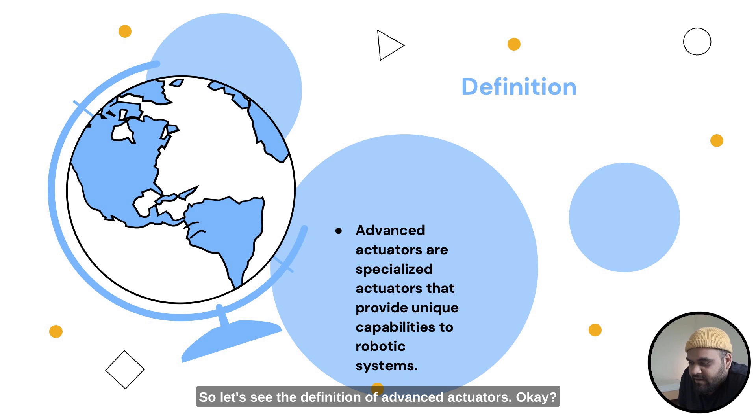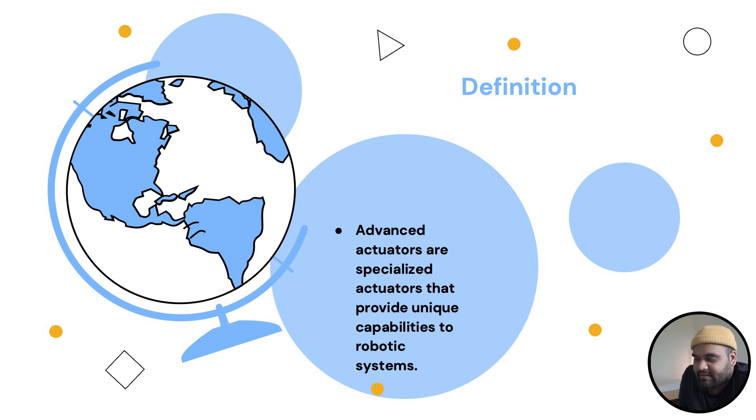So we're in chapter 4 of module 2 now, and we are going to move ahead with this. So let's see the definition of advanced actuators. Advanced actuators are specialized actuators that provide a unique capability to a robotic system. Now, when we talk about unique capabilities, it means features that are not readily available and that require something which is a little unique, but which is very specific as well. Solving the specific needs of an actuator is very important: what you are working on and what exactly it has to work on. That need-based solving is going to be very, very important.

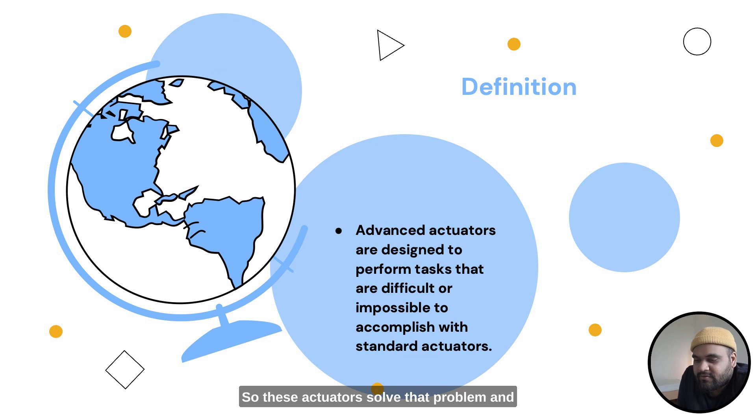Advanced actuators are designed to perform tasks that are difficult or impossible to accomplish with standard actuators. When I say difficult or impossible, it means that you would require either a lot of adjustments or an extreme amount of changes and modification, which at some point doesn't really make sense. So these actuators solve that problem and give you the results that you want.

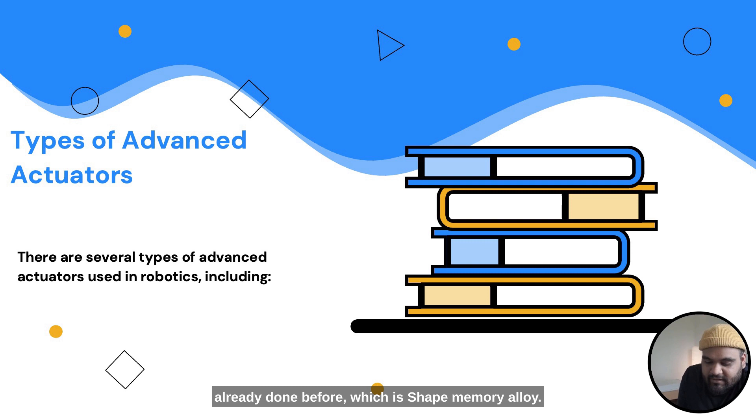And there are several types of advanced actuators used in robotics. Let's start with the first one, which we have already covered before, which is shape memory alloy. In the last chapter as well, we were talking about shape memory alloy, SMA, which can change shape when subjected to heat or electrical current. These are essentially used in soft robots or for medical engineering. When you want to explore different materials, or when you want to make a robot that can go inside the human body and still be able to retain its shape, SMA or shape memory alloys are quite popular.

You can actually go to Amazon and search for a shape memory alloy, and you will find a shape memory alloy wire, or SMA wire. You can actually buy it. Whenever you put heat on it, you can change the shape, and whenever you apply electricity, you can actually get the shape back.

Very cool wire. I actually had one of those wires back in my bachelor's days. Very, very fun memory to play with.

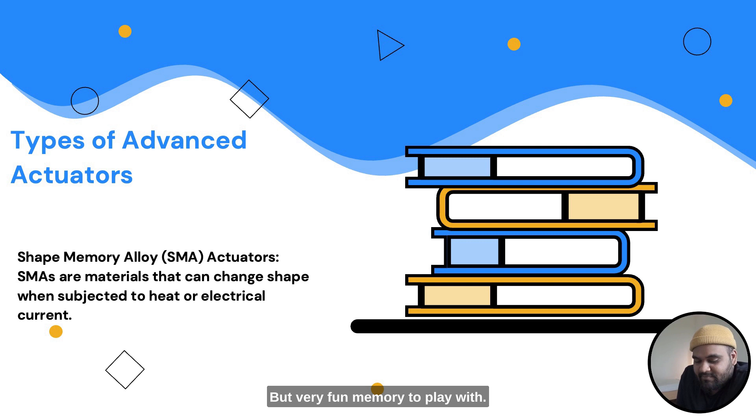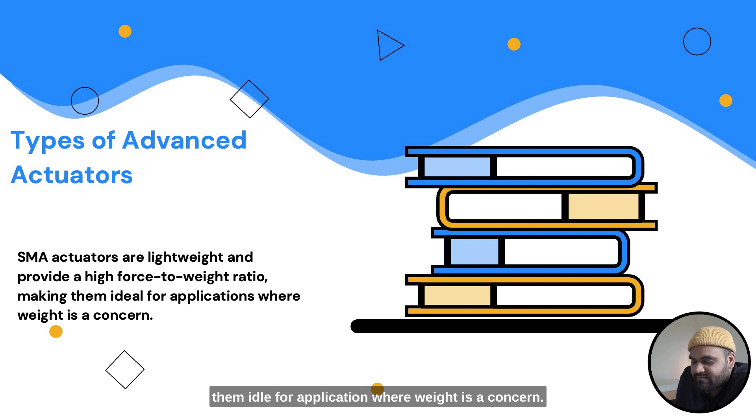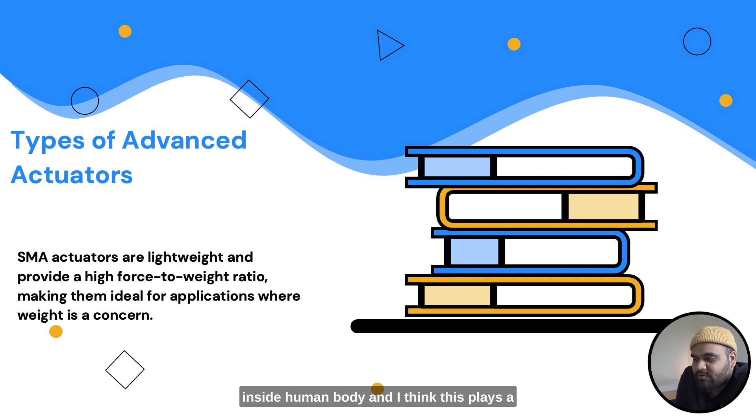Then you have SMA actuators, shape memory actuators, which are lightweight and provide a high force to weight ratio, making them ideal for applications where weight is a concern. Whenever we talk about soft robots, anything going inside your body or biological robots, shape memory alloys play a very important role because they can change shape and they're very lightweight as well. Weight is always a concern when you're putting things inside the human body, and shape memory alloys can play a decent role in making this happen.

Then you have electroactive polymer, or EAP, actuators, which are materials that change shape when electrical current is applied. They are also kind of like shape memory alloys, but they are polymers, which means they don't really have a metal finish. They're more like synthetic materials, like plastic and carbon fiber. EAPs generally change shape only when current is applied, not when heat is applied.

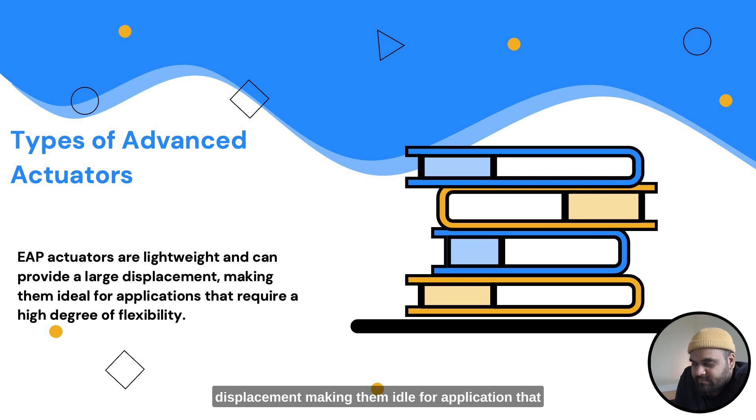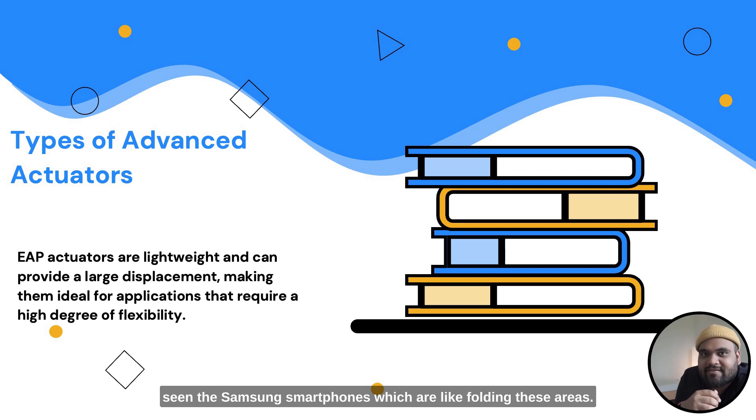EAP actuators are lightweight and can provide large displacement, making them ideal for applications that require a high degree of flexibility. Let's say you have a folding joint, or you might have seen the Samsung smartphones which are folding these days. They also actually have EAPs inside. That's what makes these joints so flexible yet super conductive as well. So these actuators are helpful when you want to make a major displacement by applying electricity, and that's where EAPs come into the picture.

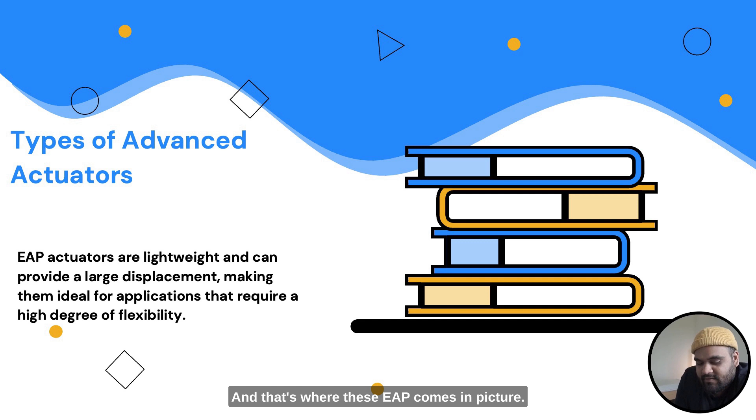Then you have the most popular one, which is piezoelectric actuators. These are extremely popular, very cheap and affordable. You can buy them on Amazon for around 100 rupees. Piezoelectric materials generate electricity when subjected to mechanical stress. Whenever you apply force or stress, they start to produce electricity. That's an important application if you need to convert force on the streets or roads, or on some mechanical places, into something else, or you just want to create electrical signals. That's where these play quite an important role.

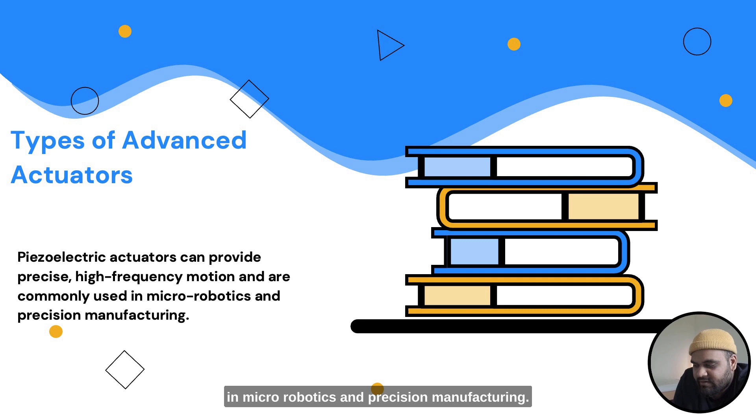Piezoelectric actuators can provide precise high frequency motion and are commonly used in micro robotics and precision manufacturing. Whenever you see small chips or small controllers being manufactured, they actually use piezoelectric actuators that move 1 micrometer. You can get a high level of precision with these actuators, and they give extremely accurate results when in action. That's why these are really powerful actuators.

Then you have shape memory polymers. If you remember, we talked about shape memory alloys and the polymer EAP. When you combine both of them, you get SMP. Shape memory polymers are materials that change shape in response to a change in temperature.

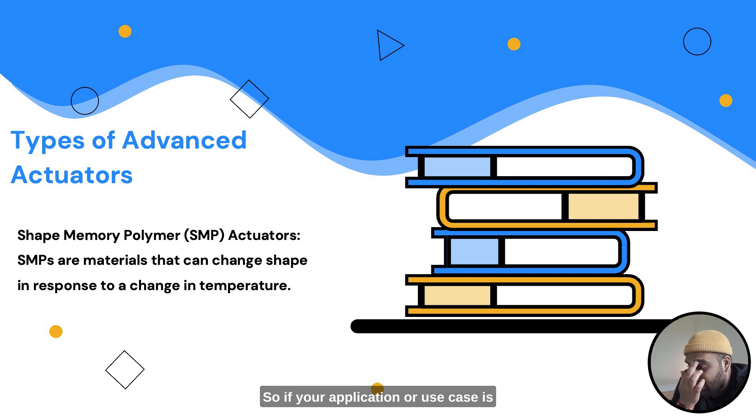Okay, over there, EAP were only changing shape when we were applying electricity. Over here, SMP change shape when you apply temperature. So if your application or use case is a temperature-sensitive application, then SMP are a better choice for your use case. They can also be used for self-folding structures. If you have seen folding structures which can fold themselves, or any sort of space exploration materials, then you use SMP. Quite an important aspect.

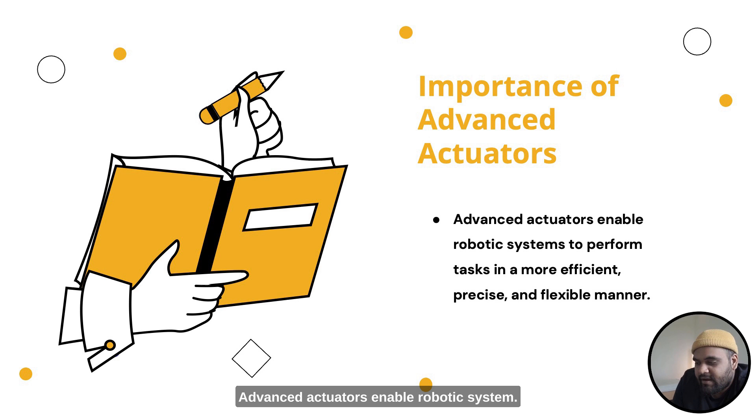Advanced actuators are important in robotics because they provide unique capabilities that are difficult or impossible to achieve with standard actuators. When you can't really achieve some capabilities with standard actuators, that's when you use smart advanced actuators. Advanced actuators enable robotic systems to perform tasks in an efficient, precise, and flexible manner. Whenever you need extreme efficiencies, that's when you use all these actuators.

They're not really that commonly used because, first of all, they're very expensive, and planning and using them can require you to make special arrangements, and that makes them a little more difficult to use as well. So in that case, you need to make sure that this actuator or this system is actually used only when you need a very specific use case. So that makes them quite unique.

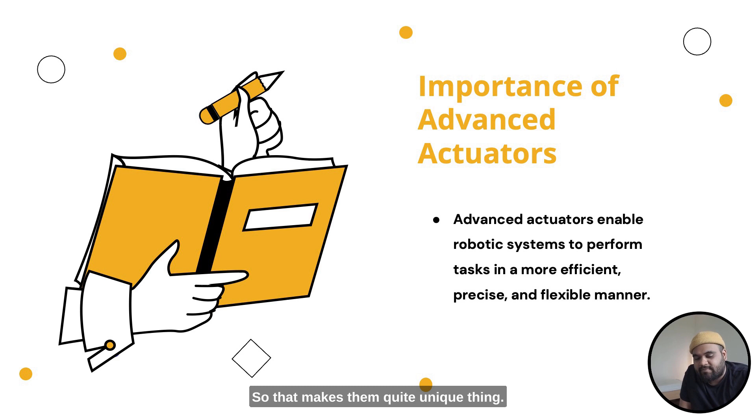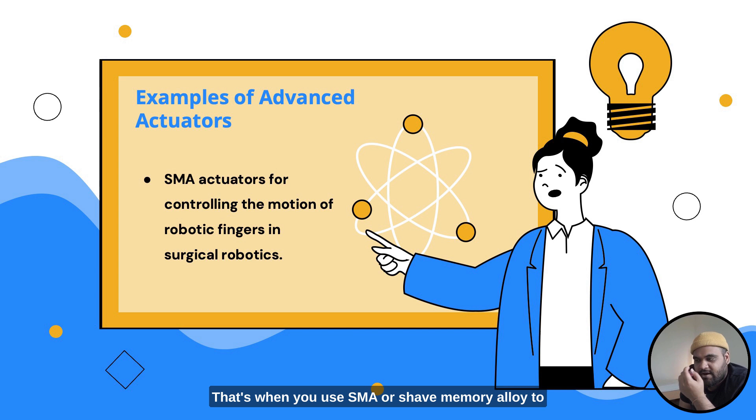Some examples of advanced actuators used in robotics are as follows. SMAs, or shape memory alloys, are used for controlling the motion of robot fingers in surgical robots. Since you have to move the surgical fingers a very small distance, it can be very difficult if you use a motor. That's when you use SMA, or shape memory alloy, to pull the string very slowly and very precisely. Very, very important, by the way.

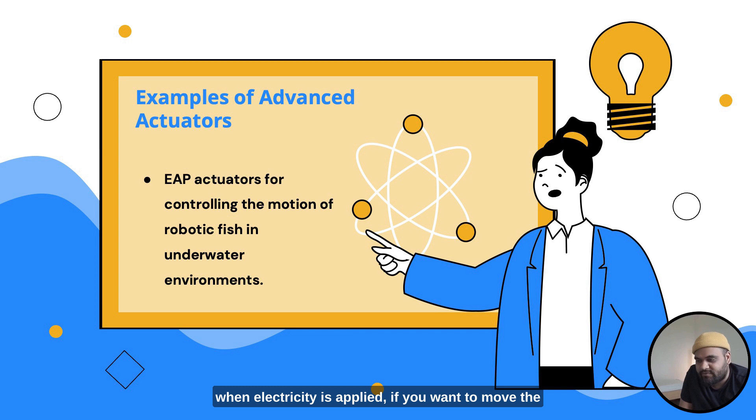EAP actuators are used to control robot fish in underwater environments, because EAP are capable of moving only when electricity is applied. If you want to move the fin or the tail, then EAPs are quite a good material for that.

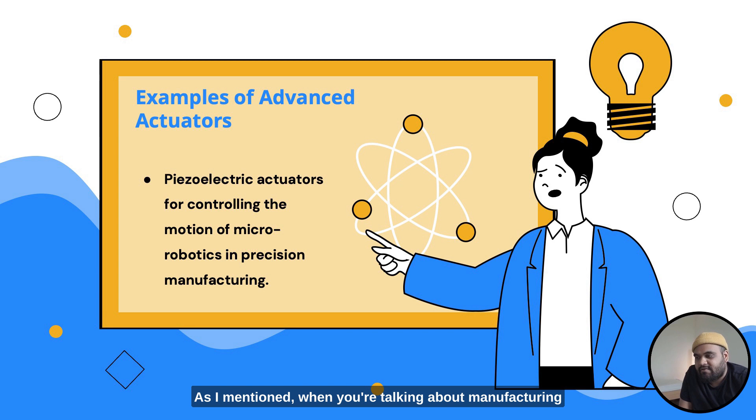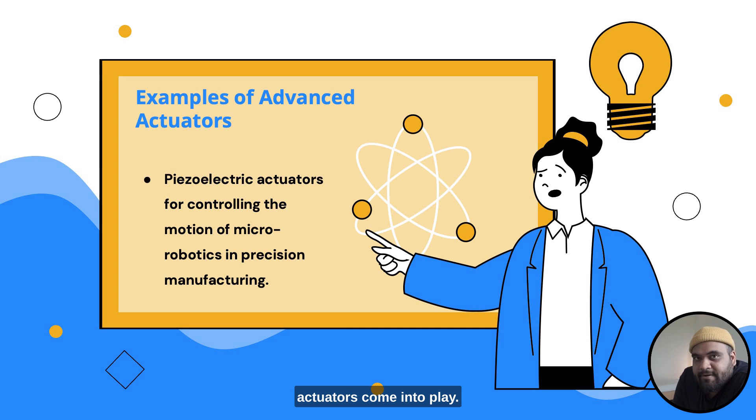Piezoelectrics are used in micro robotics for precise manufacturing. As I mentioned, when you're talking about manufacturing a small controller, a small chip, or a system on chip (SoC), that's when piezoelectric materials or piezoelectric actuators come into play, and they play quite an important role there. SMP, however, are used for creating self-folding structures in space exploration. If you want to create a structure which is going to fold itself, then you use SMP. Quite an important topic as well.

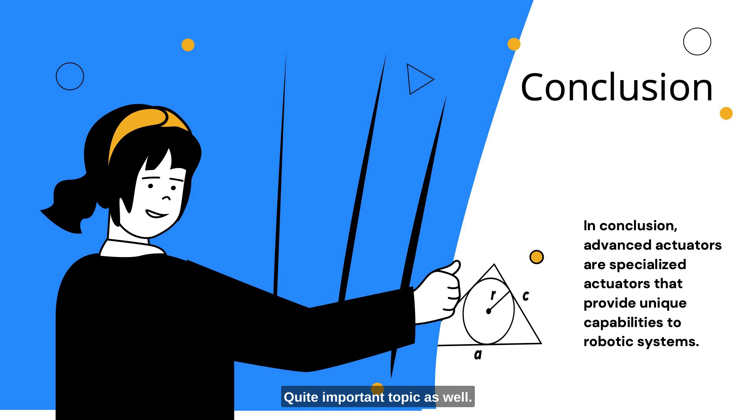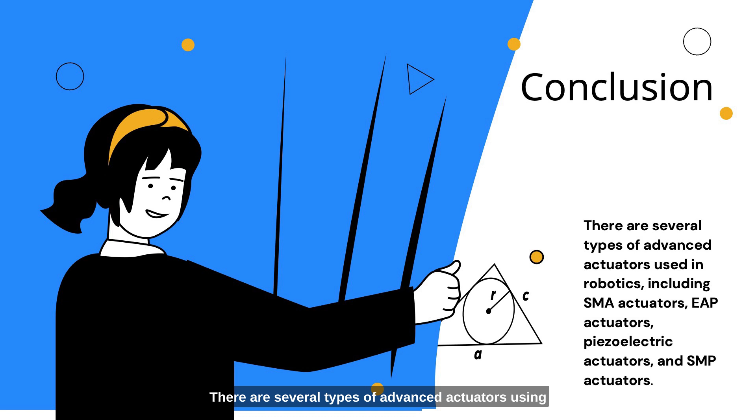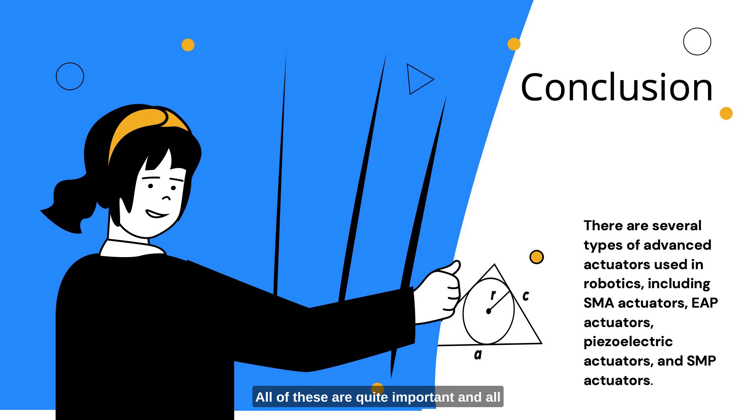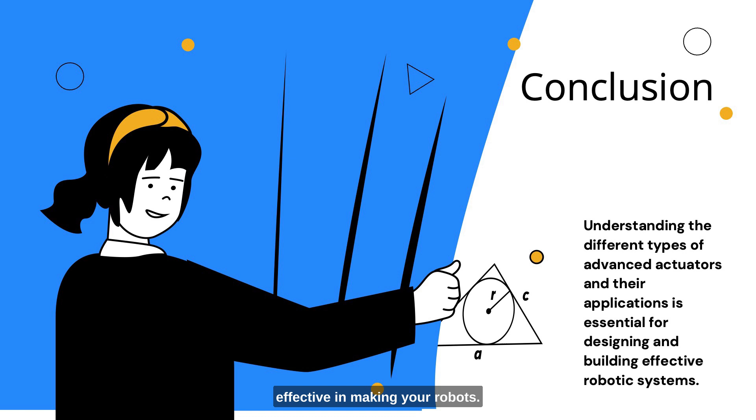In conclusion, advanced actuators are specialized actuators that provide unique capabilities to robotic systems. There are several types of advanced actuators used in robotics, including SMA (shape memory alloy) actuators, EAP actuators, piezoelectric actuators, and SMP actuators. All of these play a very important role, of course. Understanding the different types of advanced actuators and their applications is essential for designing and building effective robotic systems. Of course, you want to be effective in making your robots. If it's not effective, it's not gonna be helpful.